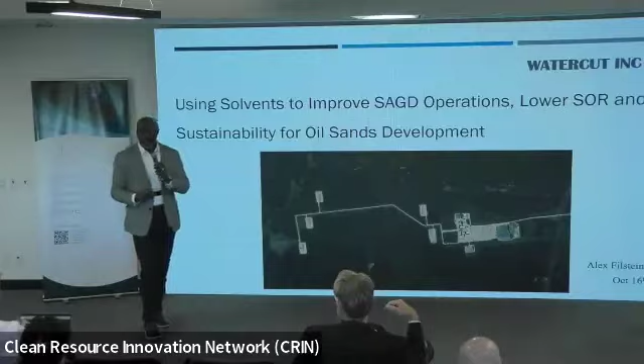And just before we kick off, we need to acknowledge the land in which we're having this event. So as we all know, acknowledgement of the land is an important step towards reconciliation. Today, as we are gathering from across Canada, please take a moment to recognize the land where you reside and work. This event is being hosted from Calgary, where we acknowledge and pay tribute to the traditional territories of the peoples of Treaty 7, which include the Blackfoot Confederacy, comprised of the Siksika, the Piikani, and the Kainai First Nations, the Tsuut'ina First Nation, and the Stoney Nakoda. The city of Calgary is also home to the Métis Nation of Alberta, Districts 5 and 6.

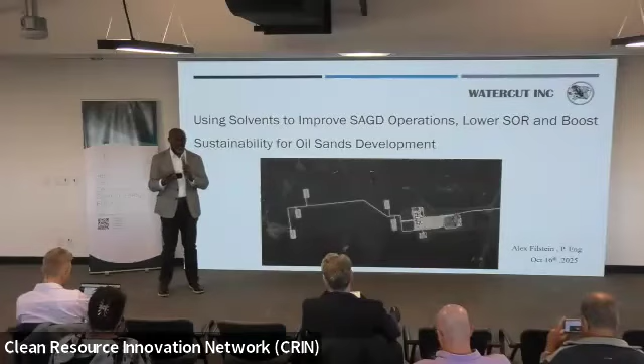So just a very quick overview of CRIN. So CRIN stands for Clean Resource Innovation Network. And essentially it's an organization that is established to strengthen the network amongst organizations that target addressing emissions from the big emitters and small emitters. And what we also do is to enable technologies that fulfill the expectations of adopters to cut back on emissions.

So as a result of that, CRIN fosters 7 theme areas that we want to apply our resources to, and in some cases funding. And when you think about our environment, the air, the water, and the land, and the extraction of resources, they all fall into 7 theme areas that we have developed. So these areas are carbon capture and value-added products, methane abatement, getting clean fuels for our cars and the planes, managing the use of water in our industry, our land use and remediation, the use of advanced digital technology to address all these theme areas. And of course, we are here to look at ways to extract hydrocarbon in a novel way.

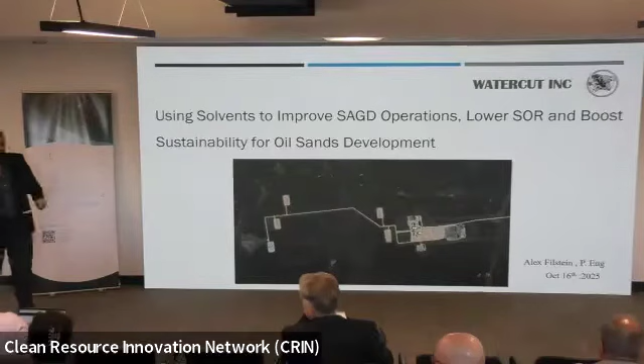I get the pleasure of introducing our speaker for this afternoon, Alex Filstein. He is the CTO of Watercut Inc. He's an expert in SAGD and solvent technologies. He's previously led technology projects for Cenovus and ConocoPhillips. He holds numerous patents and publications, specializing in thermal in-situ production optimization and green technology integration.

He's also pioneered the COSIA Pathways Solvent Consortia and served as a board observer for General Fusion, Hi-Fi Engineering, and Saltworks Technologies. He's been the recipient of the 2018 Oil Week June Warren Rising Star Award, 2019 University of Calgary Technical Achievement Alumni Award, and a 2024 ConocoPhillips Global Spirit Award. He is also an author of a book called Apollo Autism, which supports autism families, and he also enjoys supporting SAIT's petroleum engineering program for the past 13 years.

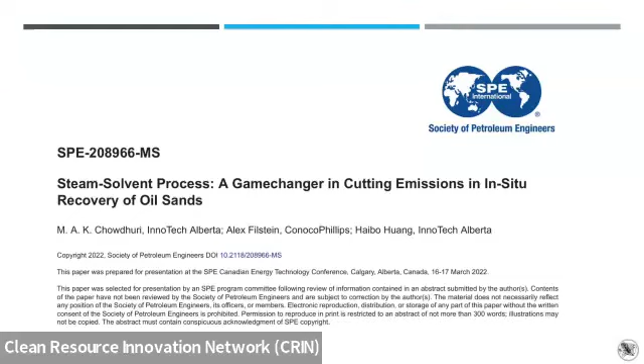And if we think about this as a reservoir, you could put a coin and then you want a bag of chips. But in the case of solvents and reservoirs, you want the coin back as well, okay?

Here's another example: food stuck in the airport vending machine. Some comments here - you get the peanut M&Ms and problem solved, maybe, we don't know. But somebody became kind of innovative, saying there should be a bar you can slide up the vending machine to knock loose stuck items, because maybe it just happens often.

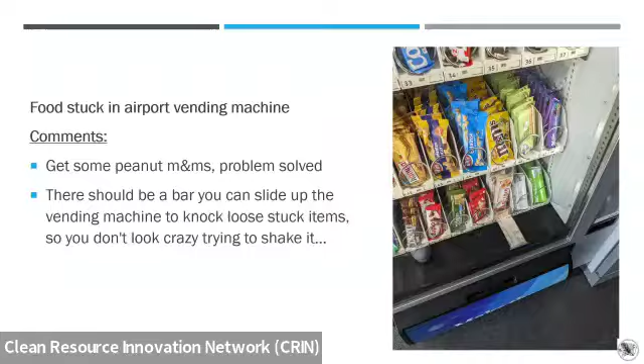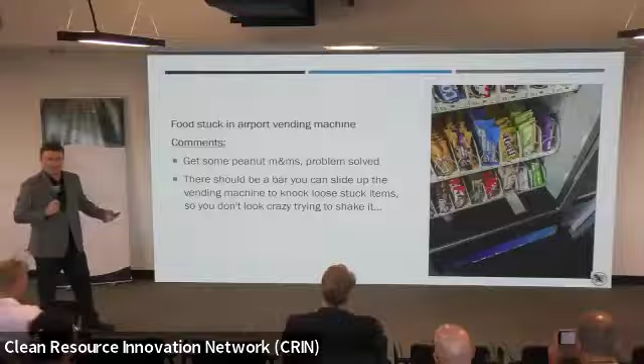And so if we think about the previous example, here we have somebody trying to think, okay, maybe there is a system we can develop to avoid all these scenarios in the future. And again, within the context of those reservoirs, a lot of us in the space tried optimizing solvent recovery in addition to oil production.

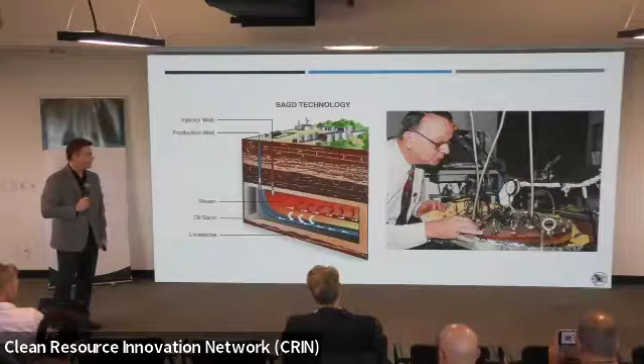All right, so let's talk about what solvent's all about and how it fits within the SAGD picture. But first, we will cover the SAGD technology. So SAGD is steam-assisted gravity drainage.

And today this industry is absolutely huge. We produce today about 1.7, 1.8 million barrels doing that, okay. The core idea here is that our oil is essentially like a hockey puck, and it's very deep underground. So we inject steam to heat transfer it to the oil so we can produce it by gravity. So that's the core idea.

The inventor of this technology is Dr. Roger Butler, who back then worked for Imperial Oil. And here you can see he's doing some kind of vessel there with pressures. It's ironic that actually Imperial didn't implement SAGD at that stage. And we actually, at times during my career, got some pushback, like how the solvent technology takes so long to develop, right? But his work was in 1978.

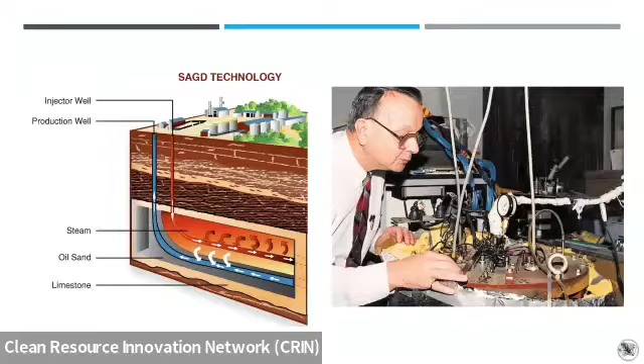And I would say we commercialized SAGD in the late 90s. Full-scale commercialization was maybe at Foster Creek, my former management during Encana days, commercializing SAGD at Foster Creek and bringing that online big time with a lot of optimization. So 20 years from 1978 to 1998, now we're 2025, I would say 20 years of technology development, and we do see commercial cases today, and I will share those as well.

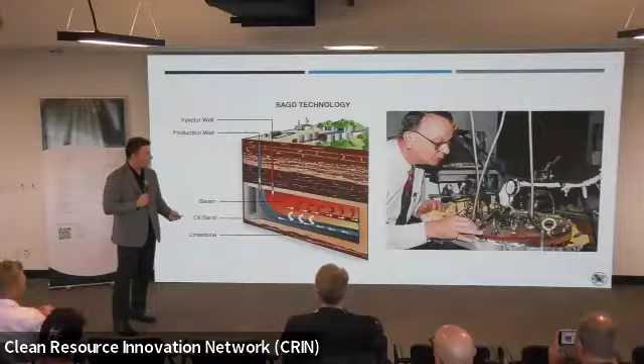The SAGD technology also was optimized over the years from a completions perspective. I talked just recently to a gentleman doing VIT, vacuum insulated tubing, but there's a lot of attempt to optimize SAGD.

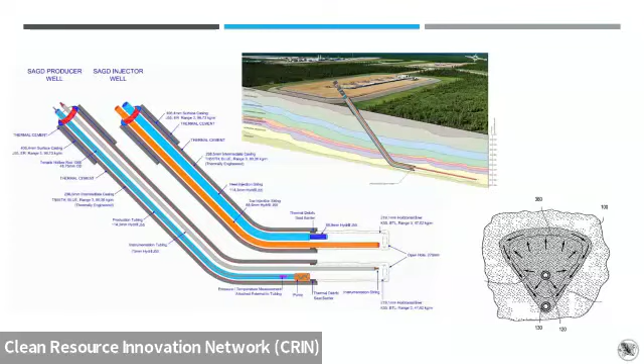As you can see, we go deep underground, and the wells are fairly long. They could be 800 meters long, it could be 1,000 meters long. The pay of the reservoirs, as you can see in this picture, could be as high as 30 meters. So my height is 170 something, times 10 is 17 meters, times 2. So those reservoirs are absolutely huge.

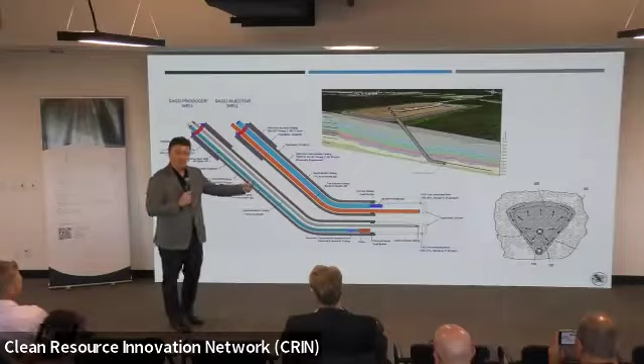That's why it's called low decline, low cost, because it takes years and years, sometimes decades, to develop those reservoirs. But from a completion's point of view, significant effort goes into the casing, control devices, inflow and outflow control devices, electric submersible pumps, and really controlling utilization of steam to control better SOR performance, steam to oil ratio.

Typically, when we talk about solvents and SAGD comparison, you will see something like this, okay? So when technology developers, corporate technology developers, go to management, they'll say, we have a base case, which is SAGD, so oil rate below. This is a simulation case, and we can boost that oil rate. On a cumulative basis, you can see below kind of relative performance, and SOR will always be lower.

But why? This is from 2014 SAGD for Imperial Cold Lake simulations. Because steam-to-oil ratio, you can reduce the S, the steam, or you can improve the oil and maintain the steam. So there's two angles to that. And we're going to cover who does what and what technologies are kind of practical. But of course, you want to uplift oil production and maybe reduce the enthalpy of steam utilization.

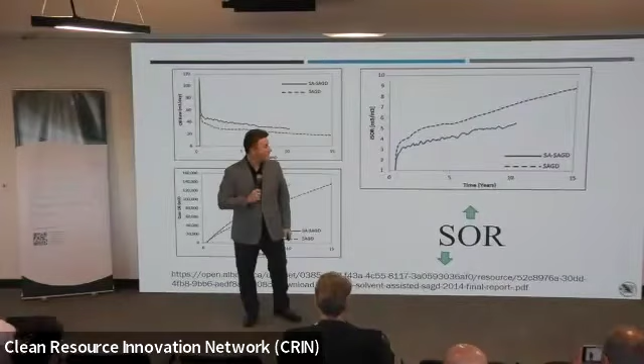So this is a little bit more like relative heights, from 120 years ago at the Athabasca River. This will be the steam chamber if it was underground, 5-meter distance between injector and producer. The height of this reservoir could be 25 meters. Saskatchewan, they're like 17 to 20 meters. We have steam chambers in Alberta as big as 40 meters in height for some assets. But reservoirs are fairly heterogeneous.

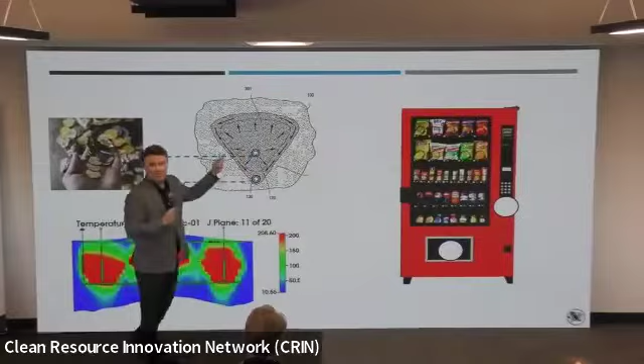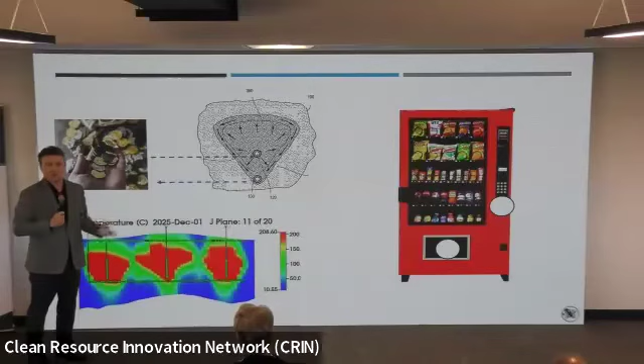Going back to the vending machine example, inject a coin, get a bag of chips. So here, basically, we inject steam. We produce the condensed water that transfers the heat to oil to be produced by gravity. We handle the emulsion at the back. And the coins here, within the context of solvents, is kind of like, yeah, I already spent money to inject that steam, but now I have to spend more money to generate that solvent and inject it. And now the expectation is that I produce it back because it's very valuable.

And those reservoirs can be very heterogeneous. So the steam chambers could be very different in shapes, have different pressure gradients, different temperatures as a function of those geologies. So guys like me in the past would simulate that and come up with a strategy on how you inject solvent, how you utilize the recovery scheme, how you boost production, and reduce emissions, essentially.

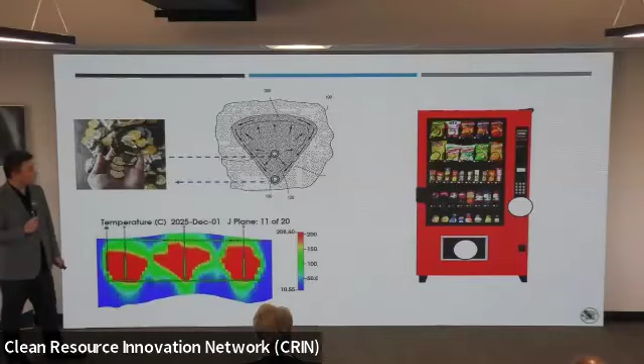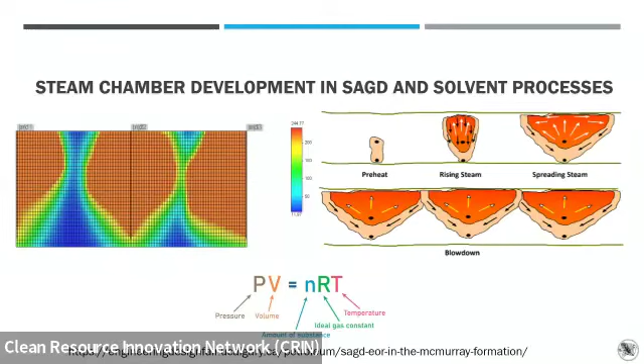A lot of us in the space that innovated tried to come up with timing on solvent injection. When is the optimal time to inject solvent? How do you recover it faster? What solvent would you use? A lot of that rising steam development on the lateral scale, a lot of us were innovating in that space.

Why do you guys think this is a very important point? Because every heat transfer for steam up to this point is heat transfer to produce more oil. But once you reach the overburden, now you have heat losses to the overburden. So you need to minimize those and expand the chamber growth so you can recover the oil.

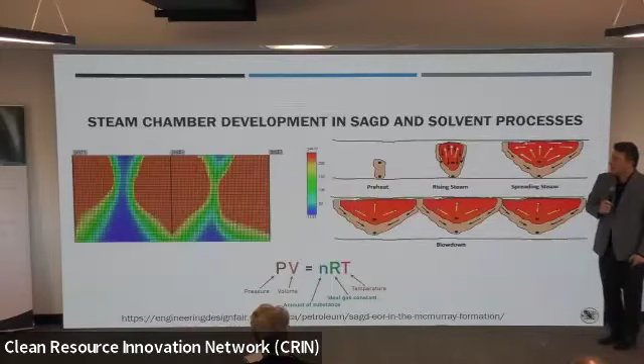And for the exercise, we use complex equations of state like Peng-Robinson, other equations of state. But here's a very simple one: PV equals nRT, the ideal gas law. Pressure is very important in reservoirs. Volume, you need to inject more steam over time, so how do you mitigate that? Amount of substance N and temperature T.

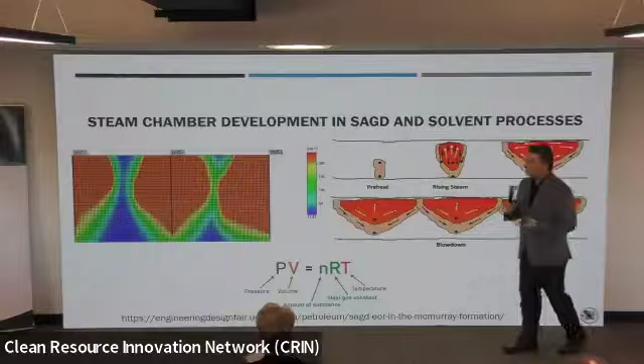So one of the disadvantages in thermal processes is that it's thermal, that you need to inject a lot of heat. And you can see on the picture there, those chambers become different in shapes. So you need to mitigate that.

Okay, let's explain the science of solvents. If there was one chart to understand, this would be it. This chart will explain to you LNG. This chart will explain CO2, CCS, solvents, SAGD, among others. So let's say you go to your friendly gas station to get propane for barbecue. So that's the yellow star.

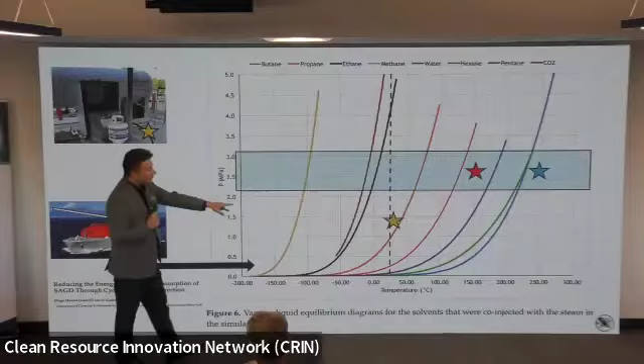In the bottle, the propane will be liquid; it cannot be gaseous, because storing gaseous propane would be very expensive. So this is the vapor-liquid equilibrium curve. My former professor, Dr. Gates, wrote a paper, and I really like that chart to explain this. So if you look at the yellow star here, this will be propane right here.

On the right side of this chart is gas, vapor. Left side of the chart is liquid. So to meet the vapor pressure conditions in this bottle, propane has to be at roughly 1.3 MPa. Do you guys see it? Once you start barbecuing, you drop pressure, you go down a straight line, you release pressure, and it becomes gaseous.

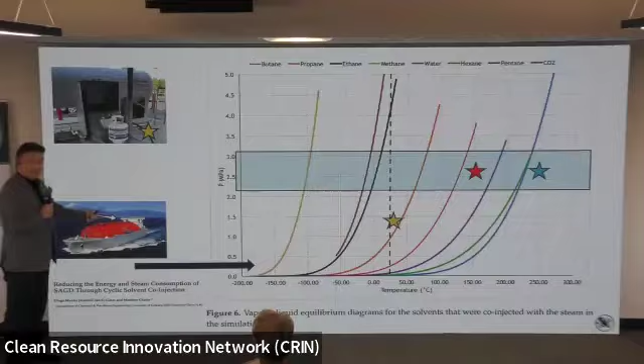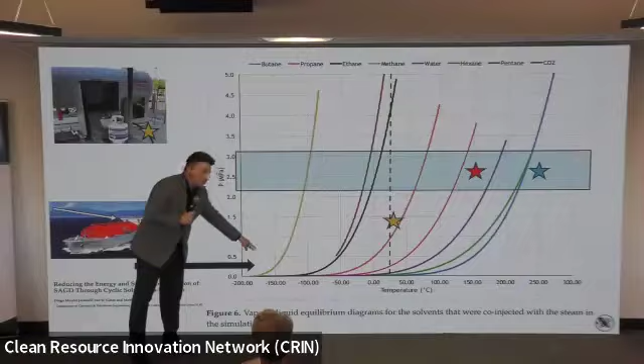Okay, LNG, those tankers, very popular topic these days. Same science, but on the temperature side. LNG, liquefied natural gas, is basically methane—over 90% of it is methane. And that cooling will be at around minus 163, minus 164 degrees, something like that. So that's the vapor pressure condition. You can see the challenge with methane and how difficult it will be to bring it to condensation, to liquid phase.

Same thing with CO2. Carbon capture—why do we go so deep underground to liquefy CO2? Because you need about 10 MPa to bring it to liquid phase. So that will be this chart here.

Okay, so now we're talking about SAGD, the blue star here. The idea is to reduce the enthalpy, reduce the energy intensity, and improve the SOR. So now you have to move to the left to reduce steam and energy associated with SAGD recovery.

Which brings me to the red star as an example, butane in this case. You can see the relative performance there. Why butane? Because it's soluble in oil. Butane is oil, just like methane is the lightest version of oil under certain conditions. It just happens to be gas naturally, so we call it natural gas.

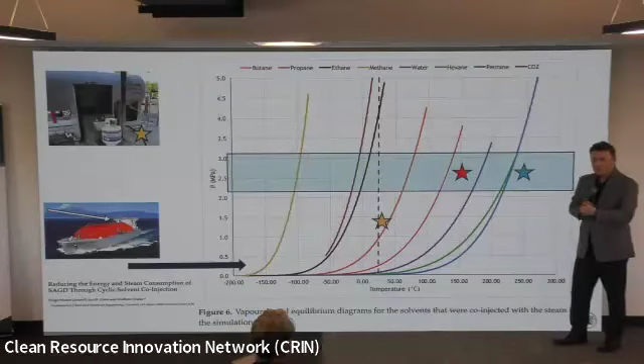So the idea here is, what do I co-inject to improve the SOR? That's really the science of solvents.

C30 plus test, shown in yellow, is really the composition of the diluent. When companies say they inject diluent, this is what's shown in yellow - condensate, diluent, hexane, pentane composition, C30 plus test. The test we use is called SIMDIST, simulated distillation.

In the past I worked on C3, propane, shown in blue - you'll see over 90% blue there. C4, butane, will be green, and you'll see it in the SIM test. That's what we co-inject with steam.

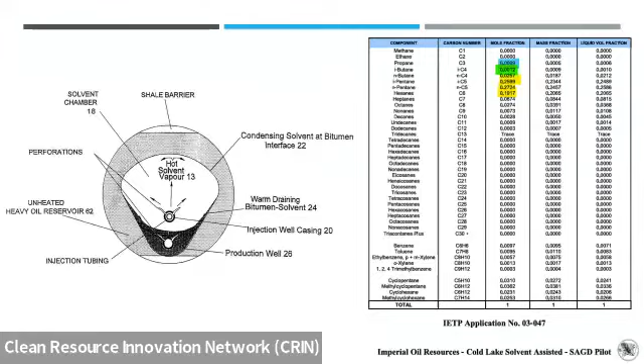The recovery scheme will be injection well casing, same as SAGD, and you're trying to create that condensation. Why does it work? Because the hot solvent vapor is injected, but the temperature is about 10-12 degrees on the sides of the chamber. So we're shifting the curve to the left, and now we have to condense. That's really the science.

Some people could say, why don't you just frack the sand? Well, assuming it's a hockey puck, guess what happens to a fracked hockey puck? It's still a fracked hockey puck. It can't be drained because you need it to be in liquid phase.

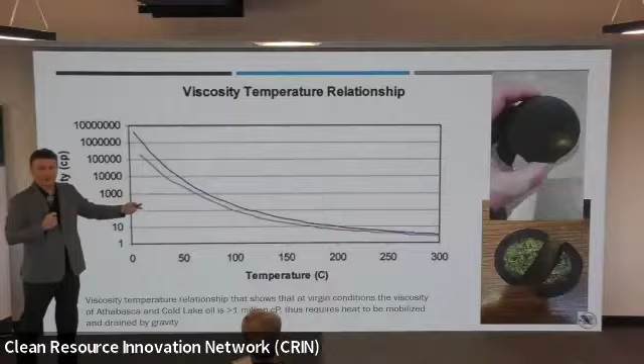In my daily life I interact with lots of finance guys. Right now we have this transaction between Strathcona, maybe Cenovus, MEG. They're talking about whether they're going to be getting shares or equity or cash.

But people don't talk much about the SORs, the efficiency of steam utilization for those assets. The lower the SOR is, the better it is - lower energy intensity, better utilization, and you can expand with more steam, basically doing more with less. That's the idea.

How do you basically create that, that's the trick. From CNRL, it's another opportunity to maybe integrate, and that's kind of what they're doing right now in Kirby South - after the Kirby South pilot, integrating solvents in Kirby North, and soon we're going to be seeing this from their public slides.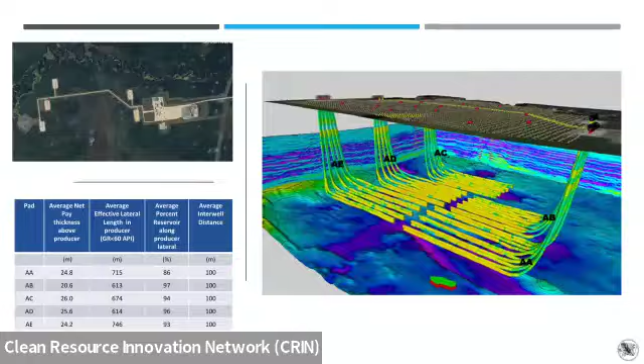By the way, they don't do solvents in this asset. They do in-situ co-injection, so non-condensable gas co-injection.

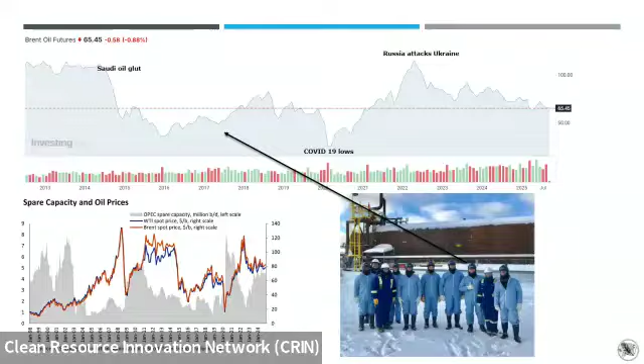And then this picture here shows basically the OPEC spare capacity. We've seen times where OPEC spare capacity declined and we saw higher oil prices. We saw times when OPEC spare capacity increased and we saw lower oil prices. So I would say there's maybe very little correlation when it comes to that.

But I'm really showing this chart because from a technology development point of view, it's kind of tricky, right? You're kind of challenging the status quo here. You're trying to do something meaningful, but it's extra spend. So that's why I believe collaboration with governments and academia is very important in this space.

WCS differentials, huge, right? We don't get WTI prices in Alberta, we get WCS. Those spreads are pretty good for this year and last year because we have the TMX expansion, which is awesome. But there were years in the past where this delta was as high as $30. And so you basically could get squeezed on the butane side or propane side, where everything converges basically to zero during a drop like what we've seen during COVID. So you need the gold coin back, and the silver, you need everything back.

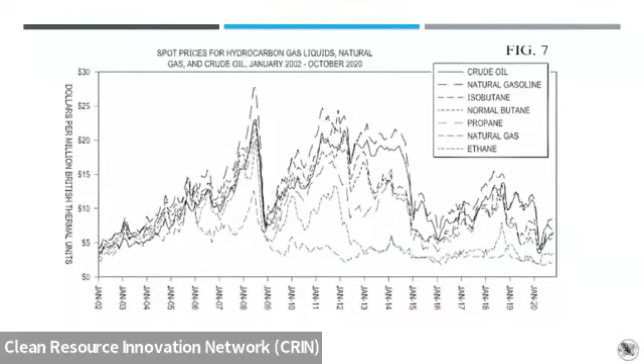So companies have opportunities to allocate capital. That's just the real world. That's how it works. So in this price volatility environment, what we see today is debt reduction. We have very clean balance sheets for many companies. Some of them are debt-free. Buybacks is a huge one, okay? Dividends, we see some M&A in the space. And then the other way to allocate capital is R&D technology. So I would say there was lots of cyclicality in this business when it comes to experimenting. So just want to provide this as a background.

For example, gold today is like 4,200, right? People buying gold, people buying NVIDIA. So not too many people think about oil companies at $58. But companies are busy buying back shares, which is great. So this is something to keep in mind, but at the same time, they're commercializing solvents, which is good.

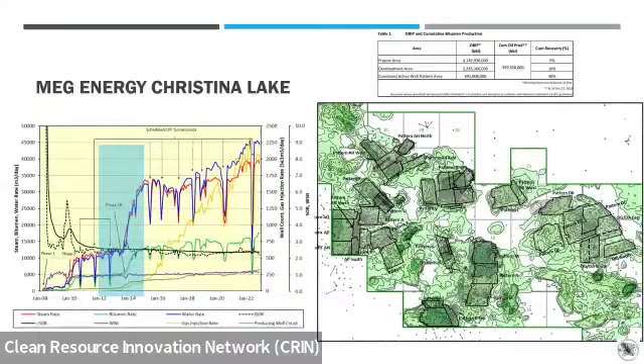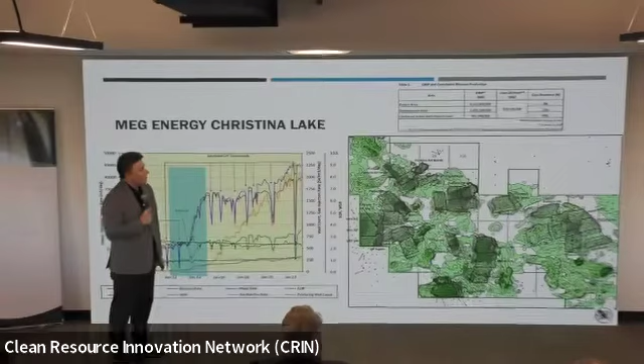I want to talk a little bit as a background to something that maybe initially looks like a bad investment, but is very applicable to today when it comes to technology development. So knowing what we know about oil prices, this is from MEG Energy, okay? So you have 4 billion DBIP, discovered bitumen in place, in the project area, about 2.2 billion barrels in the development area, which is huge, right? And combined active well pattern, 0.89 billion.

And now recovery factor is about, I would say, this is as of year-end 2023, I would say cumulative recovery factor on the development area right now is about maybe 11, 12%, meaning there is another 88% of oil to still go for the next 30, 40 years. And this is their development area there.

Now, you go into the oil glut 2014 to 2020, and look what happens here. From 2012 to 2014, significant capex is being spent for phase 2B. Red chart is steam injection, and green chart is oil production, okay? So you could say, and we had this conversation with a friend, well, this probably was a mistake, right? But today, this company is getting acquired for $8.5 billion, so 7.5 in equity, $1 billion in debt, 8.5, 85 per flowing or so.

So was it a mistake, right? So something to think about when you integrate facilities and you're able to generate that cash flow over the many, many years, there's value realization. And same, I think, applicable to solvent facility integration.

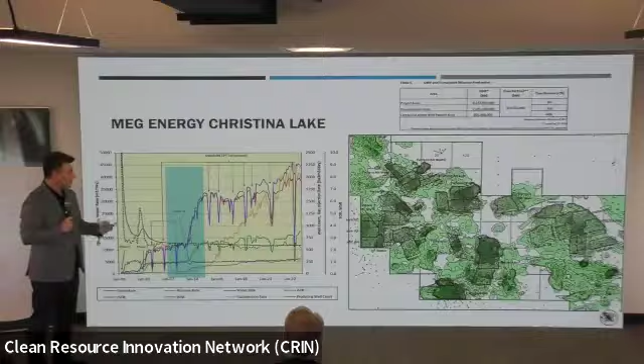Okay, when it comes to geology, obviously we have very different geologies, heterogeneities. What you want is basically the sandstone type of geology, which is oil sand. You want over 27% porosity, high permeability, so 6-7 Darcy. You want a very thick bitumen kind of slice, pay. But we do have sandy IHS.

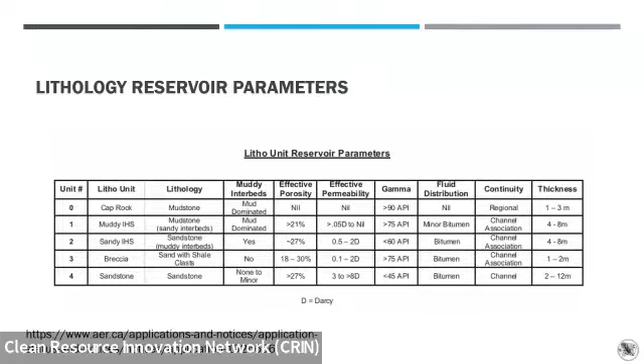IHS stands for inclined heterolithic stratification. Soon I will show a picture of that. And they could have various geologies that's very complex. So steam chamber development could be hindered because of those. Okay.

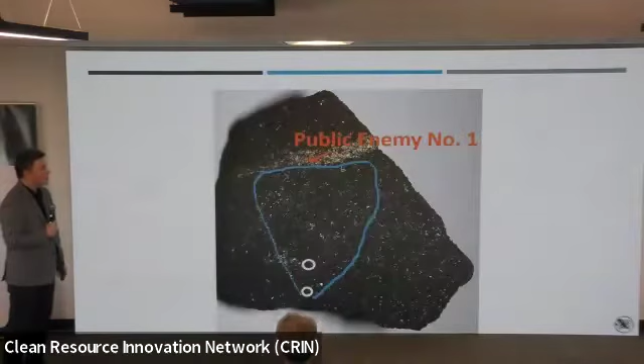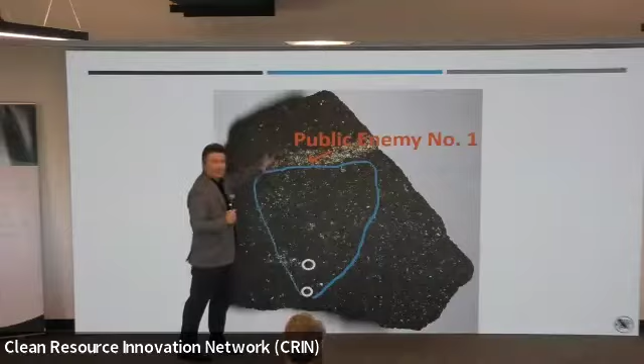One of the challenges. Another one, if you see from a broader point of view, you can have like a layer, right? So you really have to know how to kind of utilize this technology when you inject solvent and steam. And public enemy number one, right? So you have kind of complex geology, low thermal conductivity, can't really drain that oil. You're trying to develop that, but that geology could hinder the development.

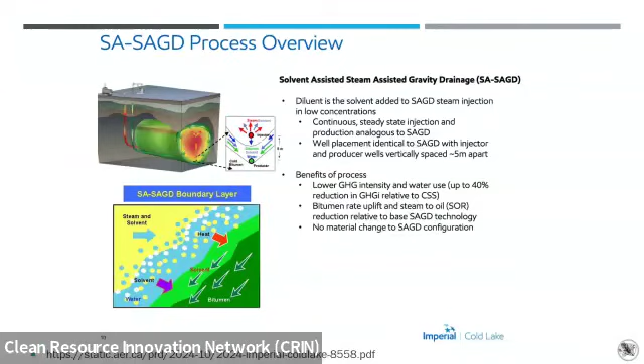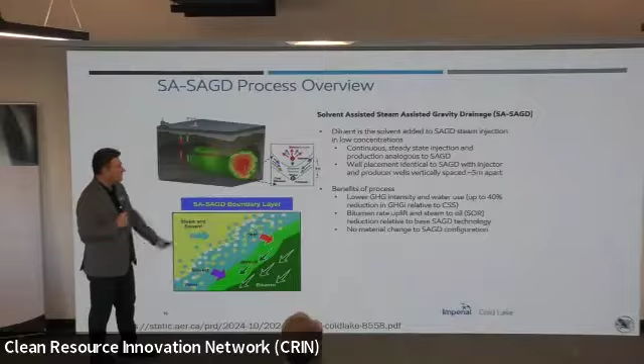And then what happens, you transfer the heat by conduction, but the solvent provides that convective forces. So conduction and convection, solubility, which is the light green, and bitumen drainage by gravity. So that's what we're seeing. Continuous steady state injection, well placement identical to SAGD, lower GHG intensity, up to 40% reduction relative to CSS. So they utilize CSS, which is a cyclic steam process.

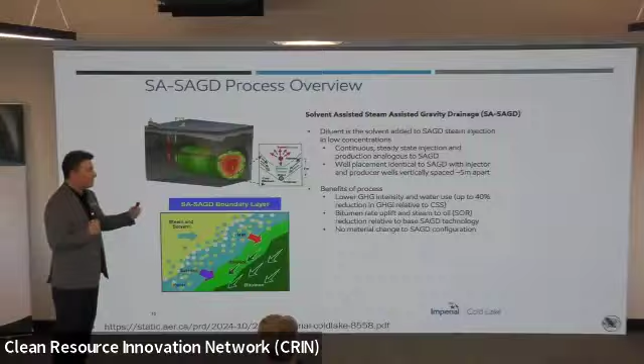Bitumen rate uplift and steam to oil ratio reduction relative to SAGD technology. No material change in SAGD configuration, and that's one of the advantages in solvent utilization. Okay, so last year, and I'm gonna be giving lots of examples for other companies as well.

Ramping up production to achieve 15,000 barrels a day, expected to reduce emissions intensity by 40%. So we see communication on the Grand Rapids project, SA-SAGD. Okay, this year, first commercial application of SA-SAGD. Okay, there were times I would show up, I would talk about solvents, people would be like, okay, whatever, sounds good, good story. And guess what?

Okay, so this is my work for ConocoPhillips, former ConocoPhillips employee, but I'll speak only to this chart without interpretation. What happened here, there is a mesh model, thermocouples, flow control device, right? Wet test meter. There is a little tray at the bottom. You inject different things, and you see what's going on at the drainage, right? A test. So the assignee for this patent is ConocoPhillips. The attempt here, optimization of steam and solvent injection, timing, and oil production.

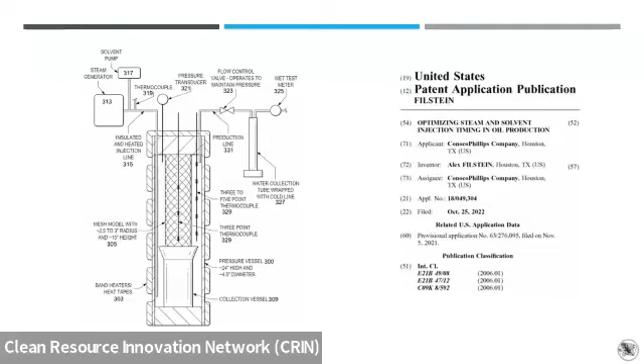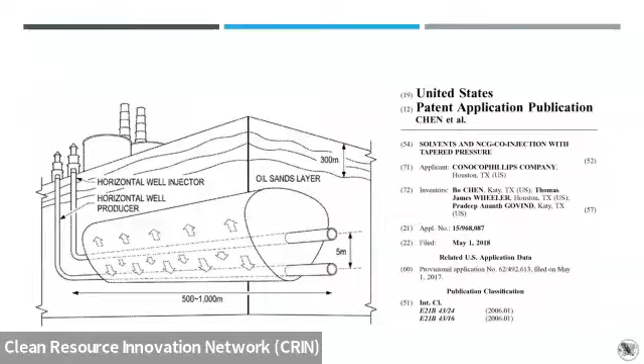My peers, TJ Wheeler, collaborator, amazing mentor. Bo Chen was an amazing simulation engineer from Houston. 5-meter configuration, injection production. Here the attempt was solvent and NCG co-injection with tapered pressure. Again, we see injection of solvent, steam, chamber development. What happens next is intriguing.

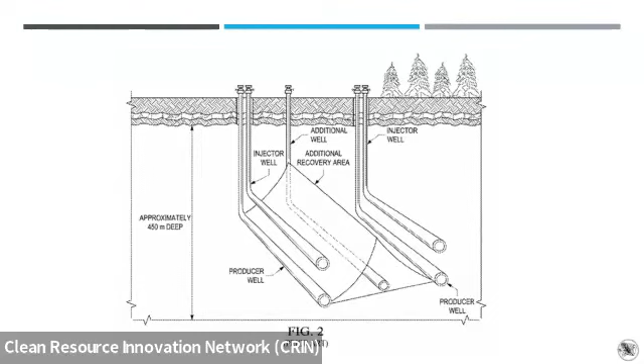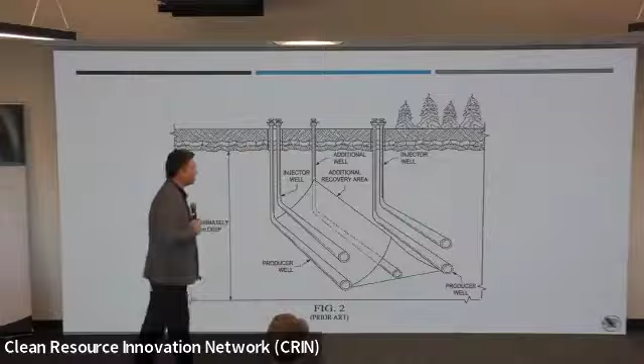We commercialized in the industry the infill wells. Those happen to be in the tier between the two well pairs. You see those right there? That heat is being transferred. That's why infills work, because you can drain oil from that section. This is prior art. 2 chambers developing. Now they're coalescing. You see the teardrop shape.

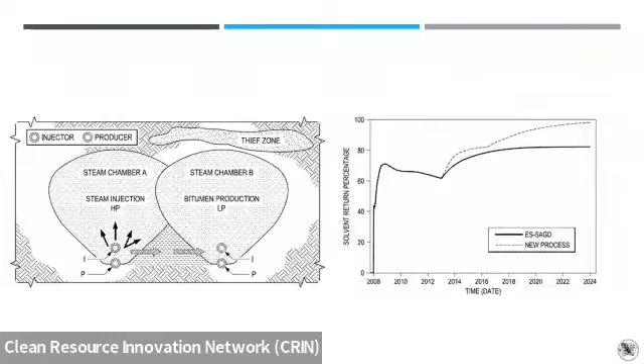High pressure here, low pressure here. Movement of solvent. You get the solvent back. And solvent return percentage, close to 100%, utilizing this process. Now, if you have a thief zone, which is a big problem for many producers, you kind of mitigate that as well. Let's say you have top water or top gas, you're able to do that.

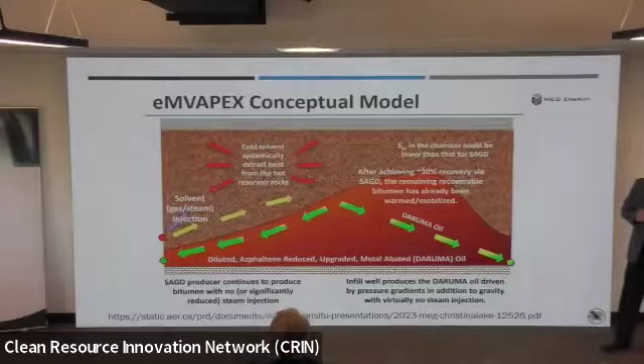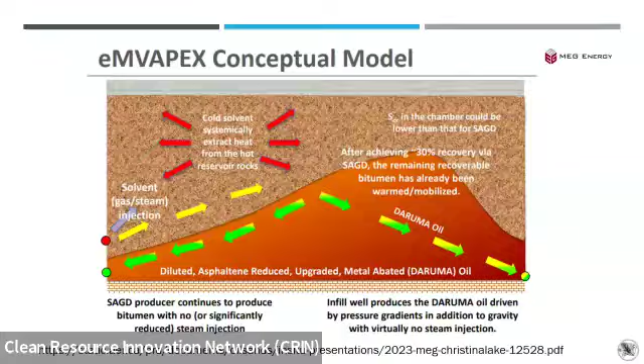MEG Energy, right? MEG is in play. We saw Strathcona, Cenovus bidding on MEG. We talked a little bit about them going into the oil glut with expanding their facilities, but they're getting rewarded now. They do something similar, but with an infill well. There's injector, producer, infill well. Cold solvent systematically extracts heat from the hot reservoir rocks. We talked about vapor pressure. We're talking about propane here.

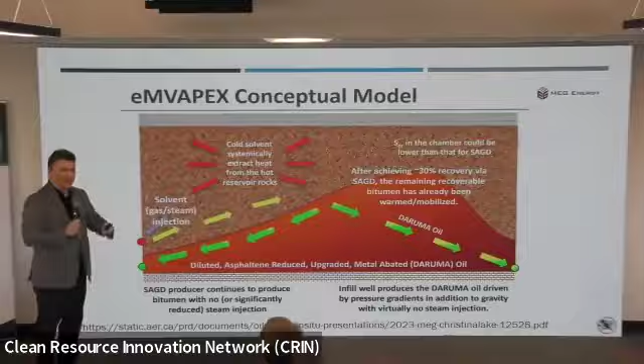And the idea here is that if you're able to go inside that oil, you will produce diluted, asphaltene reduced, upgraded, metal abated oil, okay? And this happens after achieving 30% recovery factor in SAGD. And the So in the chamber could be lower than that of SAGD. So that's kind of the concept, utilize the infill. Now they actually did it, okay? And now we're gonna see results.

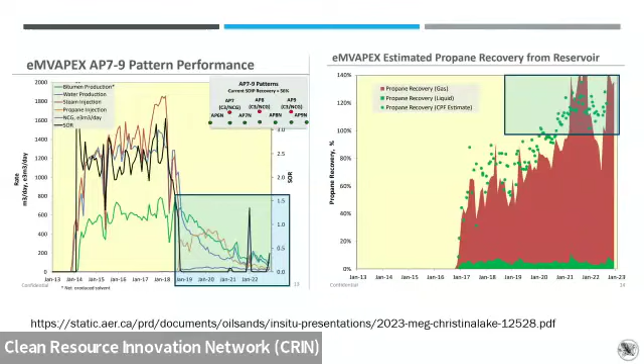So this is oil production in green and oil production decays, right? So C3 NCG co-injection, there were other patterns that they shared, but they were very close to that. So we don't see commercial implementation from MEG. What's really even more intriguing for me, and it's kind of closing the loop on what I talked about when it comes to vapor pressure conditions, is that propane recovery in liquid phase was at the very bottom here.

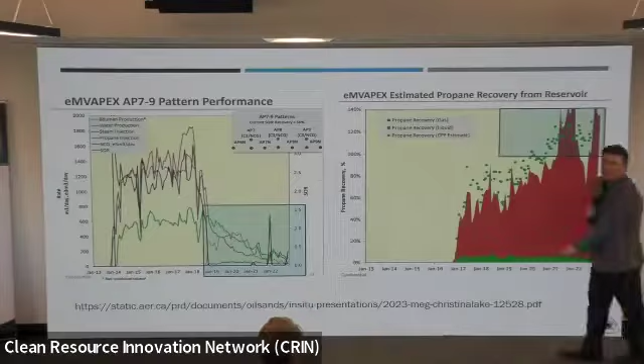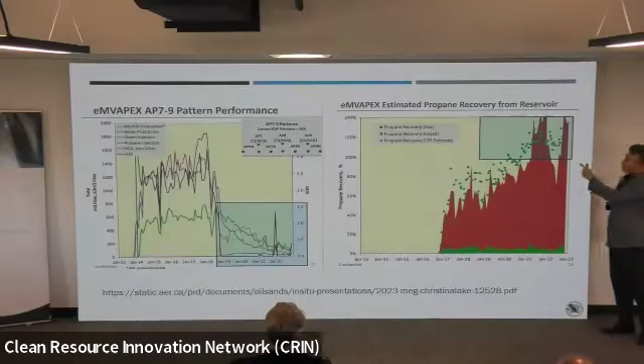So is this more like a solvent or more like an NCG? And you have huge gas recovery here from this perspective, and it's over 100% because they're able to recycle it. So I think this is very intriguing. This is in the public domain. There's a reference below, so take a look. But that explains maybe why they did not commercialize solvents.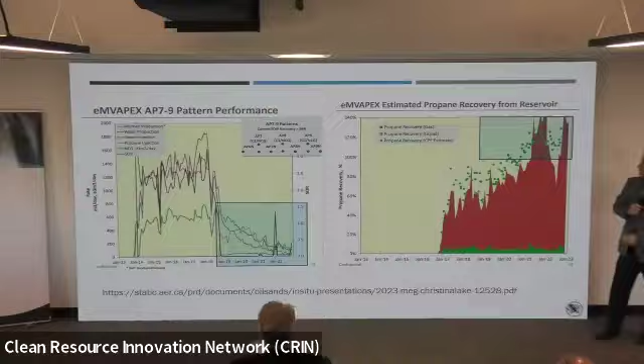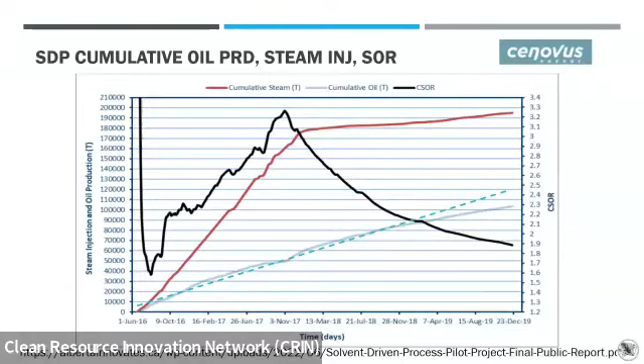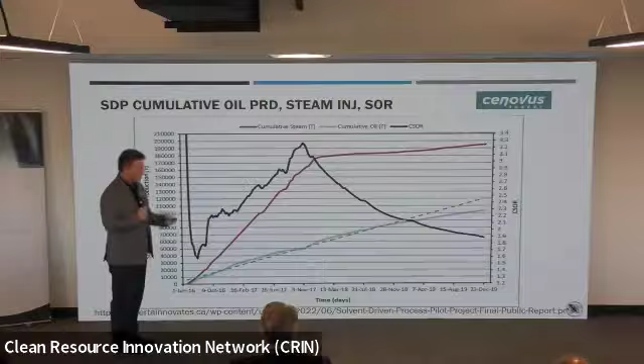So not going to talk much about this. I led this program for Cenovus, solvent-driven process: cumulative oil production, steam injection, SOR. You can basically see here how steam injection, you injected 180,000 tons prior in the 2 years, and then only 20,000 tons of steam. Huge reduction in CSOR, and you can see the oil production. I'm not sure exactly where it stands right now, but there was an attempt at Cenovus to try something from the solvent perspective area.

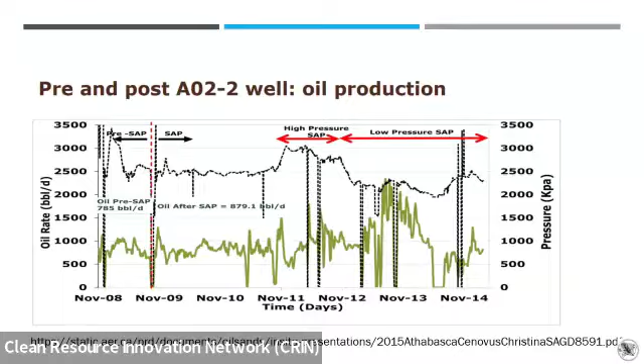SAP, early program here for SAP, solvent assisted process. When I was kind of getting introduced to this industry, started around that time frame, so my mentors were working on this. 785 barrels per day prior to SAP, 879 after, tried high pressure SAP, low pressure SAP, and you can see basically response in oil production rates.

I think what's really important is that the cumulative SOR kept declining to 1.66 over the course of this time. High fluctuation in ISORs, but pretty good performance in CSOR. So that's solvent-assisted process.

So that's kind of the attempt. I looked at the public domain data, no updates there. I assume they did not commercialize. Maybe oil rates are kind of challenging to do something in this space, right? So we talked a little bit about that as a background. Pad 203W from December 2022.

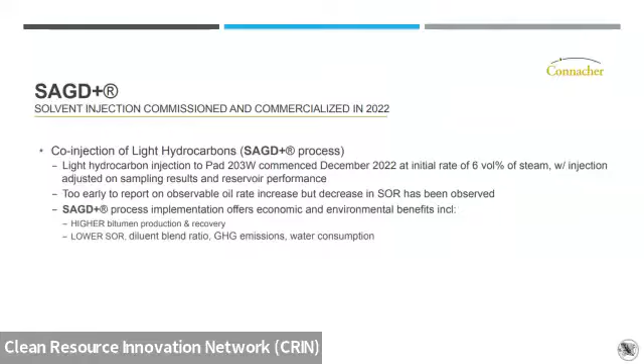Okay, CNRL. So my understanding, based on the language here, is at Kirby South they did butane injection, and they saw a reduction of 45% in SOR and GHG intensity, and solvent recovery was 85. And now the attempt is to go to Kirby North for commercial scale solvent development. They do at Primrose steam flood area a solvent injection 2-year pilot program. But here they want the target SOR and GHG intensity reduction of 45% and recover solvent at 70% recovery factor.

So everybody's doing something, right? Maybe there'll be a question, how can companies collaborate, which they do. But it seems like it's an active space. And we know the prize is huge because if you're able to reduce the steam, you can maybe reallocate it. Maybe you can take GHG reduction. So that's an opportunity. Because of the scale of the resource and the operations, any optimization here is very meaningful, especially for a huge producer like CNRL. I think they produce 1.3, 1.4 million barrels a day. So globally a huge player.

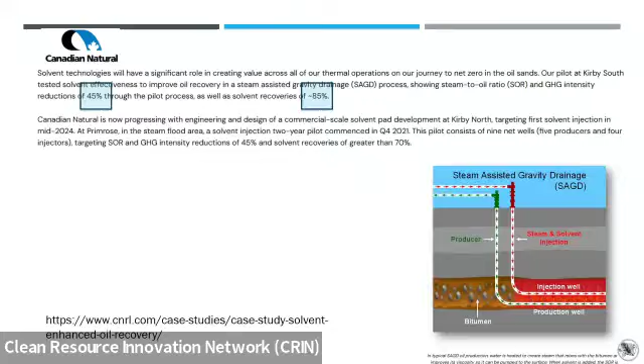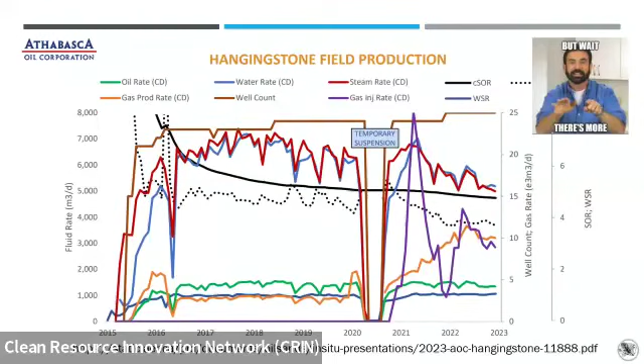But wait, there is more. Hangingstone at Athabasca, and we're almost done. They utilized, in the purple line here, gas injection rate, which is NCG, non-condensable, and cut steam injection rate in red, and oil production is sustained. So pretty much everyone, if I'm not mistaken, tries NCG integration towards end of life because the cavern becomes very big. By maintaining bottom hole pressure, you don't want to inject an infinite amount of steam, and you want to reallocate it. You also don't want your SOR to go to the moon.

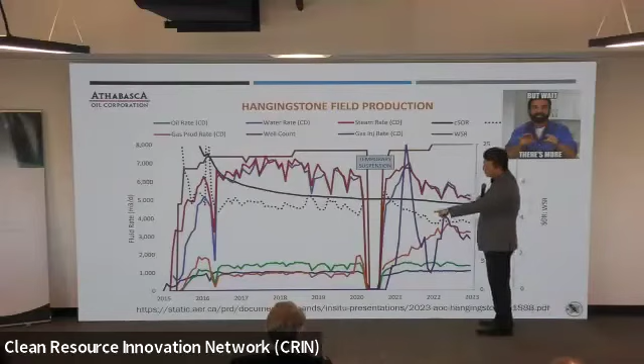So you mitigate that by cutting steam injection, NCG co-injection, and look at the SOR here going from level 6, 5 to closer to 3, 3.5. So those are meaningful cuts in the end of life. And so when we talked about previous work that I showed you, there's an opportunity here for solvent recovery because anyway companies will inject NCGs.

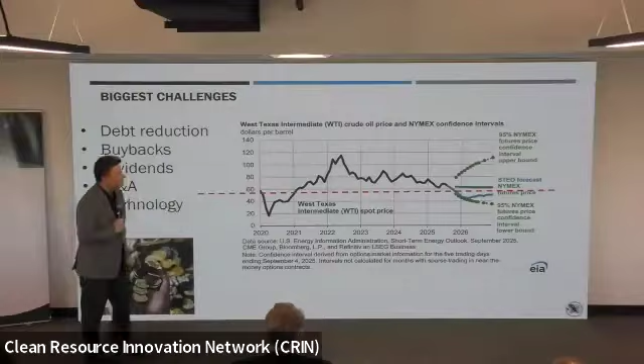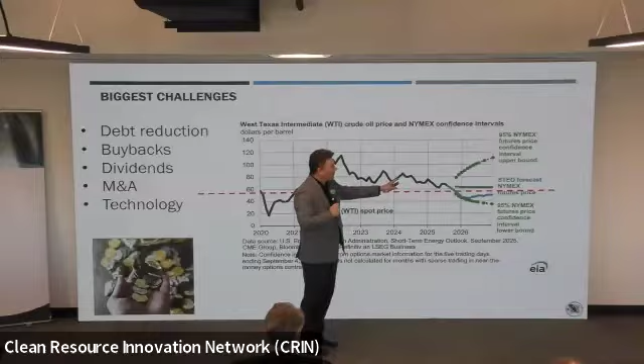Okay, so what are the biggest challenges? So this is a WTI crude oil price NYMEX confidence intervals for next year, 2026. Sad news, guys, $60 oil. But a confidence interval could be 110 and maybe 30. So I'm dropping the mic at this point. Kind of unfortunate, right? I wish we had more confidence. But I think that's the challenge.

How do you allocate capital, right? And we saw in the past where capital was allocated, and in the end, after a decade, you could monetize that. But again, companies are very busy now reducing debt, protecting the balance sheet, buybacks, dividends. We see some M&A. We saw Whitecap merging with Veren. Now we see play on MEG. And so whoever wants to grow a little bit more, maybe kind of busy allocating capital, but what role does technology play in this environment, right? So this is more of a question, I guess, to the audience to provoke some kind of thoughts about this.

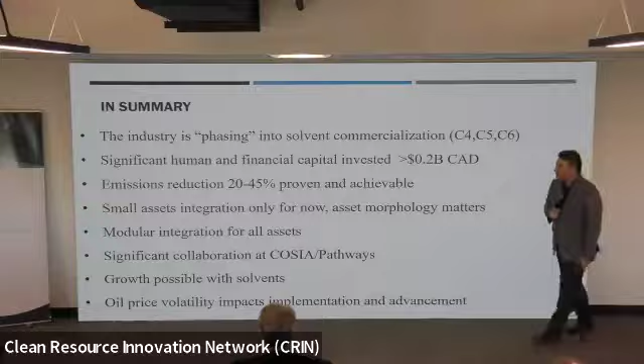Okay, so in summary, this is my last slide. The industry is phasing into solvent commercialization. C4, C5, C6. We saw Grand Rapids SAGD C5, C6, which is diluent. C4 butane attempts. My understanding, Kirby North could be next. Significant human and financial capital invested. I personally was co-pioneer at COSIA Pathways Solvent Consortia, collaborated with many of you. My understanding, just kind of doing rough math, we spent over 200 million in industry. Could be closer to $500 million over the past 20 years on solvents.

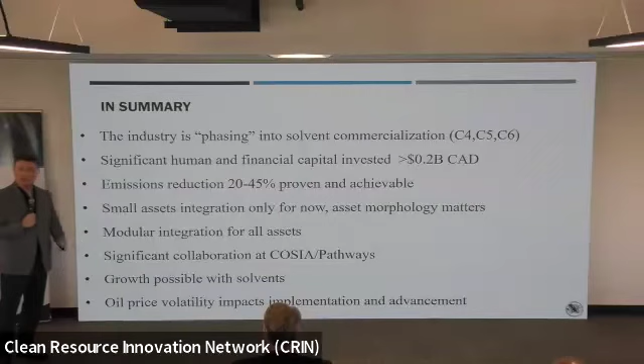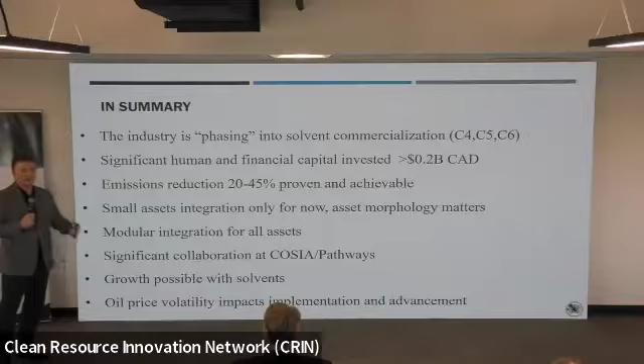Emission reduction opportunity, based on everything I shared, is between 20 to 45%. Small asset integration for now, asset morphology matters, right? So we saw some huge assets, we saw smaller assets, but when I talk about Kirby, you can maybe do a pilot in Kirby South, then you commercialize in the pad Kirby North, and maybe you scale as you go from there. By the way, I'm not suggesting they're gonna do it, I'm just kind of speculating based on publicly shared slides. Modular integration for all assets.

There's no scenario that I see here where we're saying, okay, here are the keys for SAGD, we're done, we're doing all solvents now. I don't see that at all, but I do see it as an extra layer to reduce emissions and improve oil production. Significant collaboration at COSIA Pathways. Growth possible with solvents. I think you can start thinking about it now. How is it possible? Well, if I'm able to reduce steam, I can deploy that steam without maybe building new facilities to generate that steam. And oil price volatility impacts implementation and advancement, and I think it's kind of a given based on everything I showed so far.